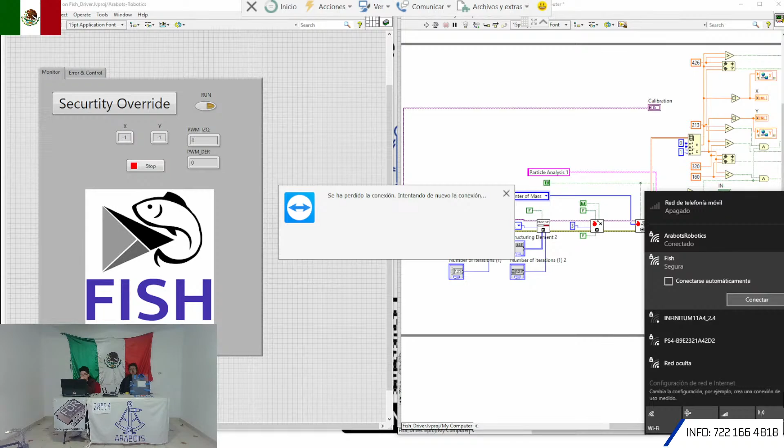Can you see it now? Yeah, so you've got three screens. Are they going to be using a microphone where you are? Let me see if you can hear them. Hello, can you hear me right? Yeah, it's far away, but you just have to make sure you speak loudly.

Okay, there's a slight change in the order. It's okay, you're going first. We're on something else. No, we're fine, don't worry. Thank you very much for that. Okay, Shannon, anything else?

I can't think of anything right now. No, I think you're good. They got control of it, so I think you're good. Okay, so thanks, anything else? I will be doing that, thank you.

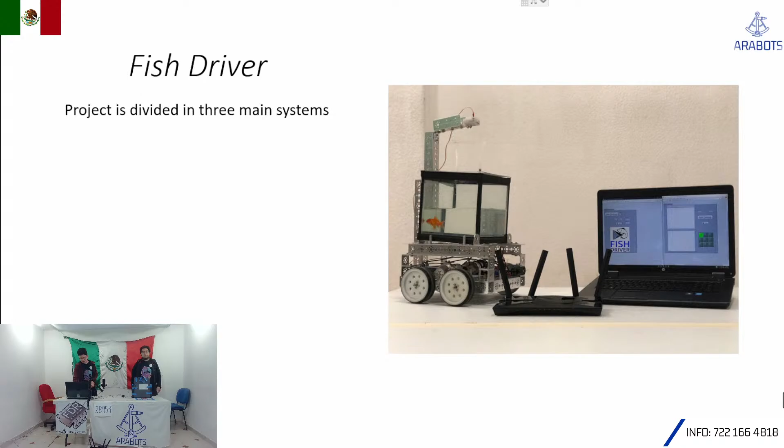This project is divided into 3 main systems: the vision system, the navigation system, and the communication system.

The first module is the vision system. The first step is to acquire an image. Then we apply an RGB model to create a binary image. Then we define our target using different morphology techniques. At the end, we can track our target. The processed image can then be used as an input for the control of the navigation system.

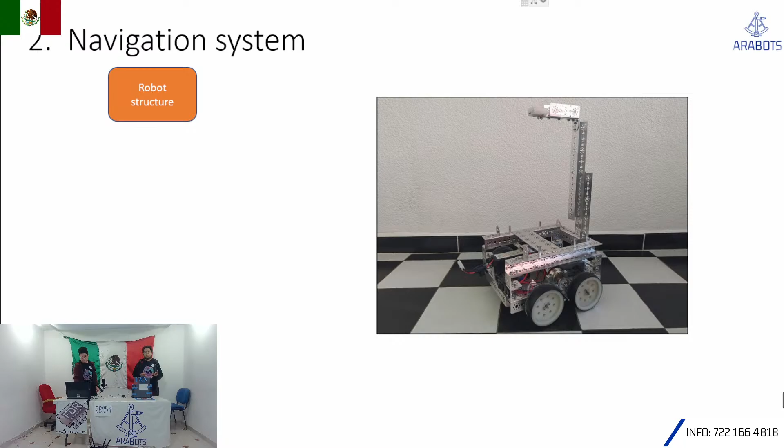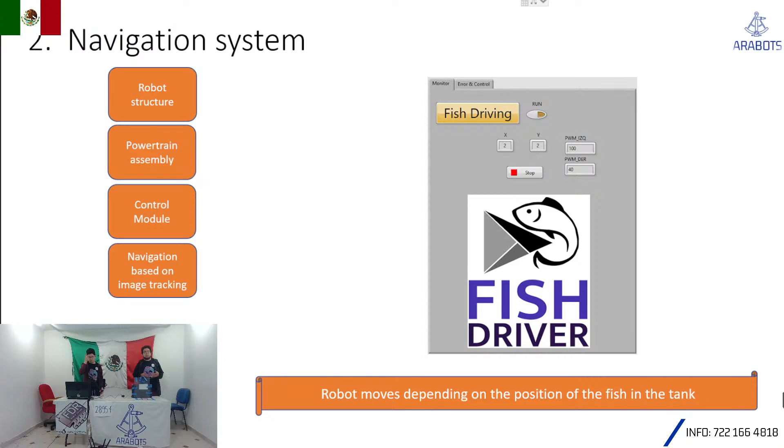The second module is the navigation system. The robot structure is all built of aluminum. The powertrain assembly is the battery and the motors. And the control module is the myRIO. This gives us the navigation based on image tracking. The robot moves depending on the position of the fish in the tank.

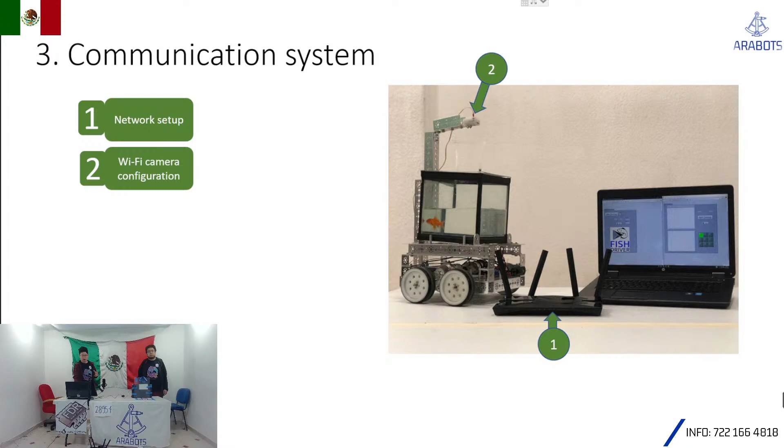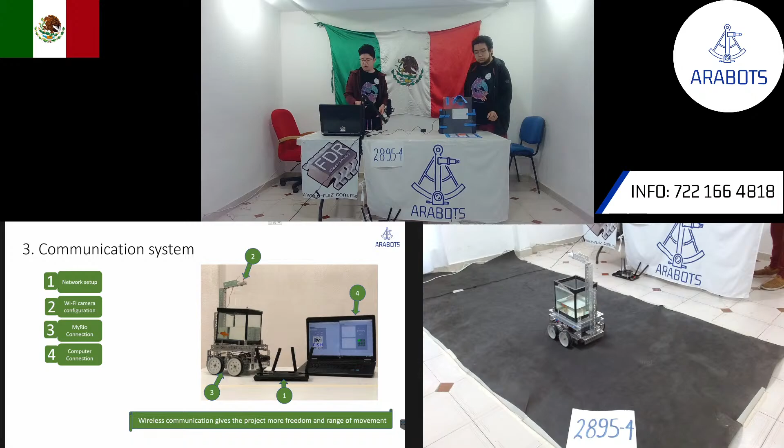Now our last system is the communication system. First we set up a network, then we configure our Wi-Fi camera on top of the robot, then we connect the myRIO to this network, and also connect the computer. This gives us a wireless communication that gives the project more freedom and a greater range of movement.

Now, the product roadmap: we have real-time vision acquisition and image processing, drive control based on vision system outputs, wireless connection setup between systems, and with all of this, we have a full autonomous working system.

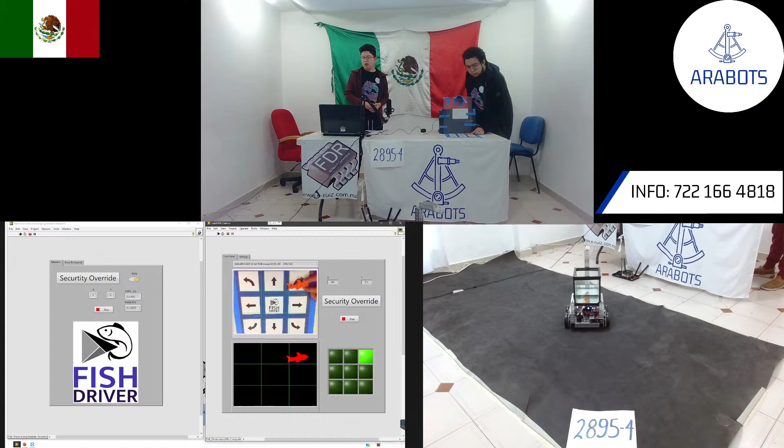Now, while I was explaining that, my friend Daniel was controlling the robot using the security override. This allows us to prevent the fish from going into danger and keeps it safe at all times.

But we can also switch to the camera on top of the robot that is watching the fish. Now the fish is controlling the robot. The robot is moving depending on the position of the fish, as you can see in the bottom left. And now it goes into a danger zone, so we bring it back with the camera.

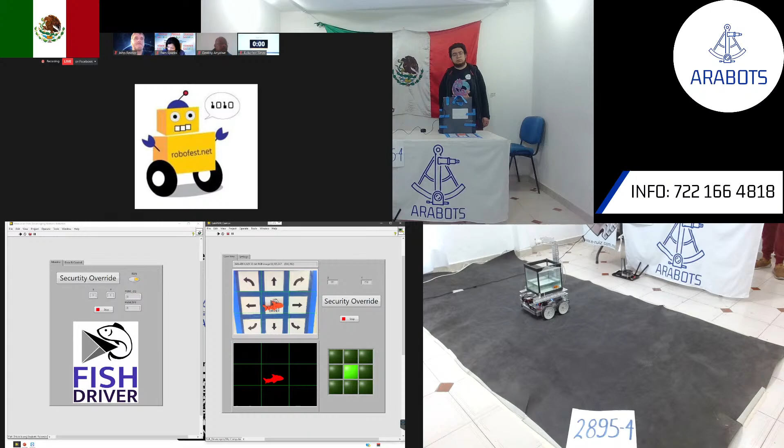Recording in progress. There they are. You have to do our other device. Okay, got it. This is the laptop. Got it.

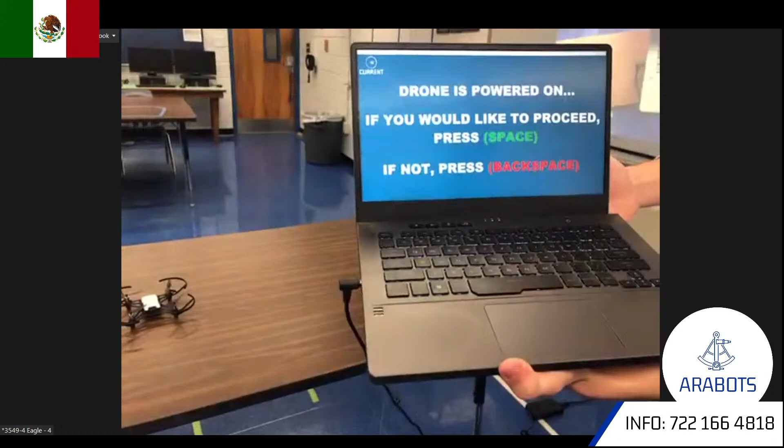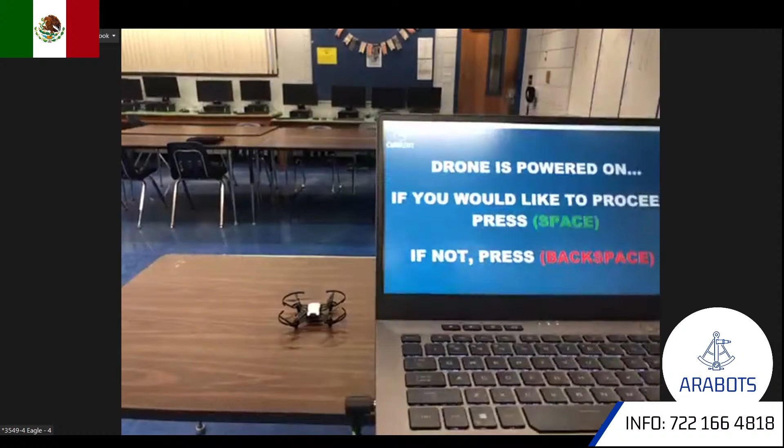Okay, so I first made a prompt because there have been many times while programming this where I accidentally click run, or I accidentally run the wrong program, and the drone just starts flying and mayhem ensues if preparations aren't made. So I created a little prompt: if I press backspace, it closes out of the code and nothing happens, and there's relief that we didn't have a false start. But if I press space, the program will start.

I'm going to start with my closed hand in front, as the instruction manual said. The CV2 window takes about 5 to 10 seconds to load, but now it's loaded. I'm going to open it, and it's going to come a little closer. I'm going to have it do cardinal directions, so it's moving up right now. I'm going to hold it down, and now I'm going to make it travel downward.

I'm not comfortable with this close space, it's too close to me, so I'm going to use force here to make it travel backwards in the Z direction. Then we'll do right, and left. You can also do combinations, because it works as a full velocity vector matrix, so I can make it go diagonal. Let's try bottom, left, and back, and see if it... yep, so it comes down, left, and forward.

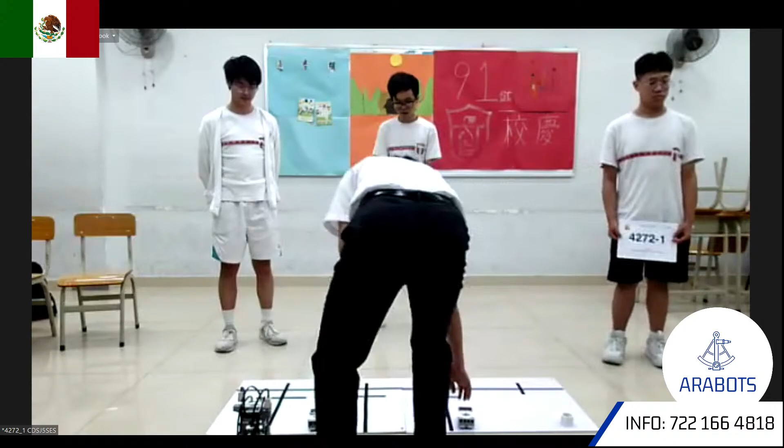So now let's start it over again. So now it's going to room 2, like that.

Okay, so that's all we have for our presentation. Thank you for listening.

Judges, do you have questions? Yes, I do. Guys, thanks for the presentation. What will you say is maybe some kind of training you've gotten, maybe from mathematics, physics, computer science, that you use in this project?

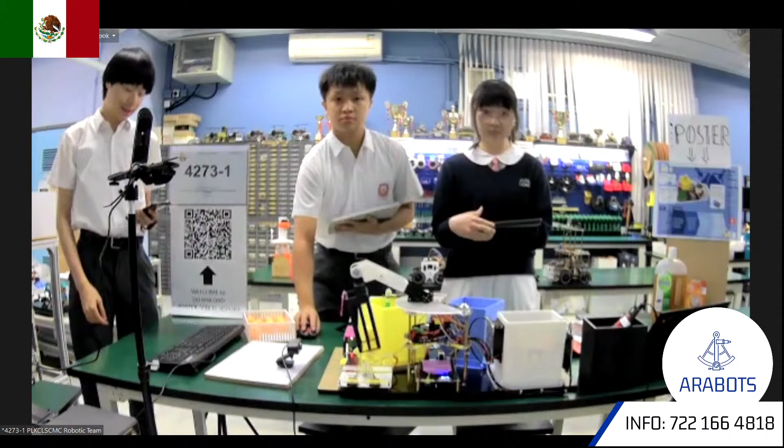Let us demonstrate how our machine operates. When the switch is turned on, two servos will control the arm with a basket containing the table tennis balls to return to its original position. All the data will be reset. The movement of the arm is controlled by the cooperation of two servos: one for horizontal movement and one for vertical movement.

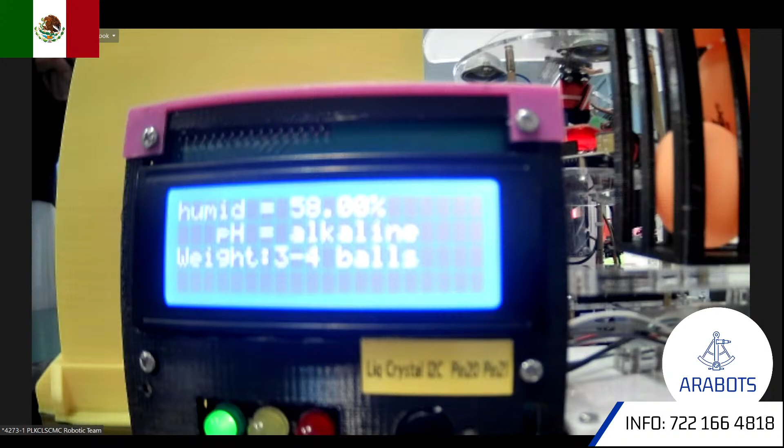The table tennis balls will be soaked into baking soda solution and Dettol respectively. After pressing the start-stop button, the LCD monitor will display all the necessary statistics, including model information, pH status, number of balls added, and humidity of the fan box. The weight sensor is used to measure the number of balls in order to prevent overload or the situation that no ball is put before the soaking procedure starts. The procedure will only start when the weight sensor measures 1 to 6 balls.

The humidity in the fan box is sensed at 58%, and the pH of the baking soda is measured alkaline. The pH meter is installed to monitor the pH value of the baking soda. Baking soda is used for removing grease and dirt, while the table tennis balls are soaked into Dettol for the elimination of virus and bacteria.

The table tennis balls will eventually be carried to the fan box for drying. We have attached heating tubes to the fan so that a more ideal drying temperature can be provided. The drying process will be finished when the humidity has decreased by 5%. After the table tennis balls are dried up, the arm will carry them back to their original position.

For the do-while structure, if the final humidity is lower than the initial one by 5%, the fan and heating tube will stop working and the basket will return to its base. Otherwise, the fan and heating tube will keep working and measuring the humidity every second until the requirements for returning to the base are satisfied.

We have also installed a button. If the measured pH is not alkaline, or if the number of balls added in is null or more than 6, it will not be suitable for the machine to start. It will be displayed on the LCD monitor to remind you to change another tank of solution or check if there is a suitable amount of balls added.

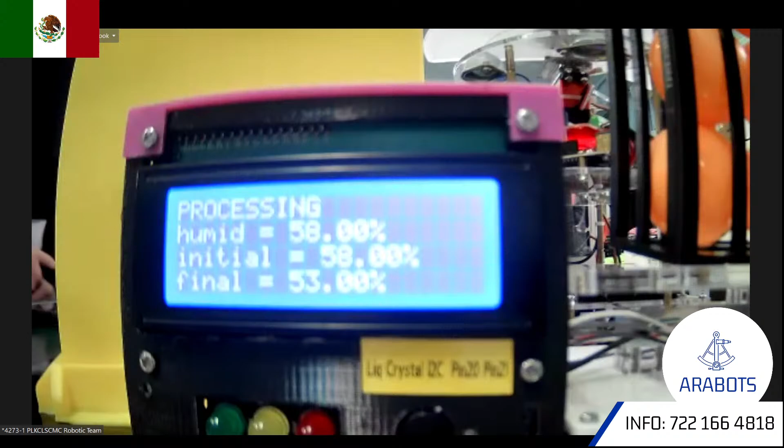For questions and answers? So, yeah. Oh, John, go ahead, please. Go ahead, Destiny. No, go ahead, John. Go ahead. Okay.

How did you come up with 5% humidity being necessary for optimal drying?

Because we have measured it for several times, and after a few experiments, we tried 2%, 3%, and 4%, in similar ranges, and we found out that after the humidity of the sensor in the fan box has decreased by 5%, the table tennis balls are nearly all dried. So we take this value in our program. Thank you for your question. Thank you.

Thanks, John. Thanks, John. Hey, guys, this was a good one. This was good.

So did we see the demonstration of the project apart from the drying? Did you play, or where's the sport activity here? Like, I'm trying to find where the sport stuff comes in.

Mainly we use the table tennis ball as our project's target because it's small enough and easy to do our experiments on. But with further development, many other sports equipment can be used in our program for disinfection, such as tennis balls, golf balls, badminton balls, or even non-sports equipment, such as tablewares in restaurants or pens used in public examination sites can be used as the target of these disinfection machines.

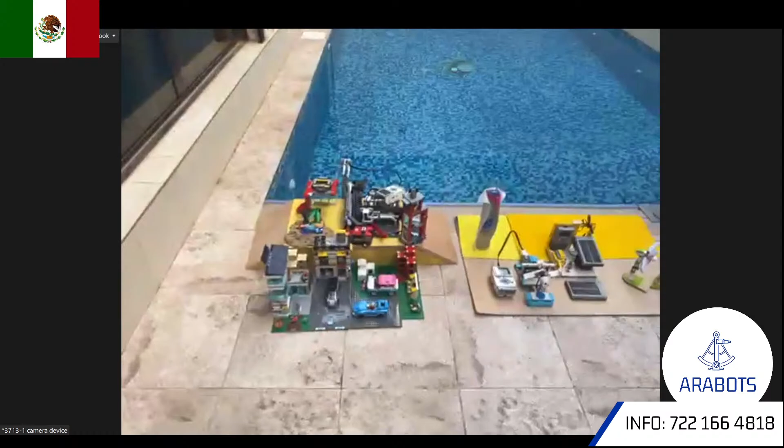As you already know, we had an accident with our project, and this is what we had to do with solving it. First, I'd like to zoom in on our little city right here and talk about our problem. Our problem is the usage of fossil fuels, natural gas, and other non-renewable harmful materials in sea transportation, and how it can badly pollute the sea and make it harder for marine investigations in future scientific research. As well as the long durations it takes cargo and sea transportation, which has led to unnecessary human resource consumption, such as excessive food, excessive oils, and other things we can really cut off on. So what we did to try and solve it is we created a fully automated seaport that uses renewable energy sources, such as the ones displayed right here.

Here we have three types of renewable energy sources. First of all, we have hydroelectric power. Give me a second, I'll talk about the other one while the power is on. We also have solar power and wind energy represented right here.

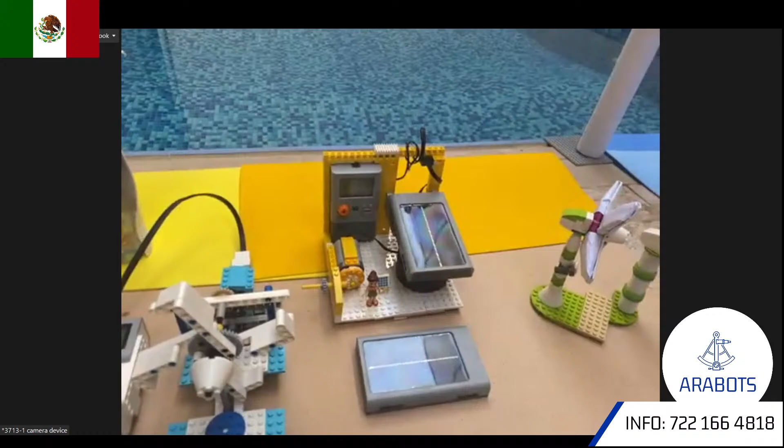Now we will share screen because our sun has set where we are. It hasn't set, but it's not powerful enough for the solar cells. So here, the solar station power uses LEGO renewable energy kit solar cells to power a motor, just to show that it can be used as kinetic energy for future uses. Is the screen share there? One sec. Okay, so this is a representation of its movement in the sun.

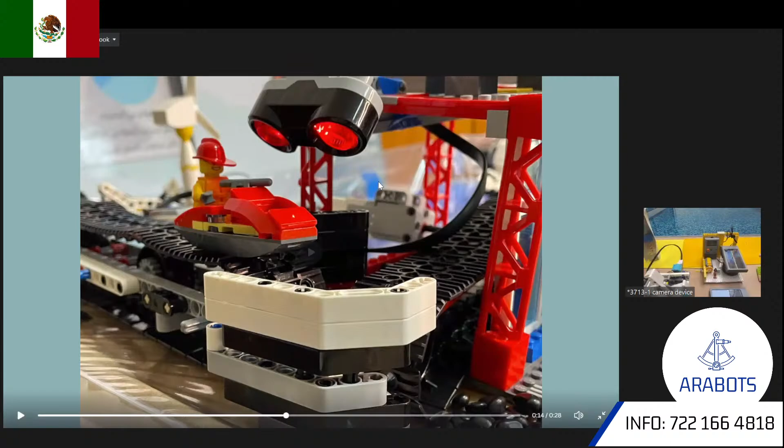Now moving on to the other energy types. We have wind energy using turbines here, and this Heron's fountain using physics mechanisms. This figure has a lab coat and tie right here. This uses conservation and conversion of kinetic energy to potential energy in water systems to be able to produce a fountain to power this lovely device. And this, in turn, shows us how we can use hydroelectric power to move things, such as this hydraulic lift right here for this house.

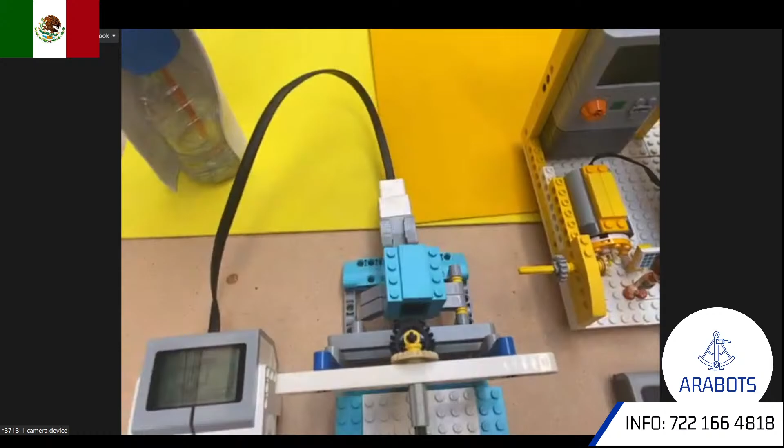And then moving on to talk about our marine system and the transportation vehicle system right here.

The vehicle transportation system starts upon the launch of the artificial intelligence drones that specify the optimal route for the self-driving vehicle to find the perfect destination. After that, it goes with that path to the smart seaports and the designated destination.

When it gets to the smart seaport, which is represented in this model, the vehicle starts here. The sensor detects its presence and moves it into the garage. After that, a collaboration starts between artificial intelligence and the Internet of Things to check the vehicle condition, and then a report is sent to the operation manager.

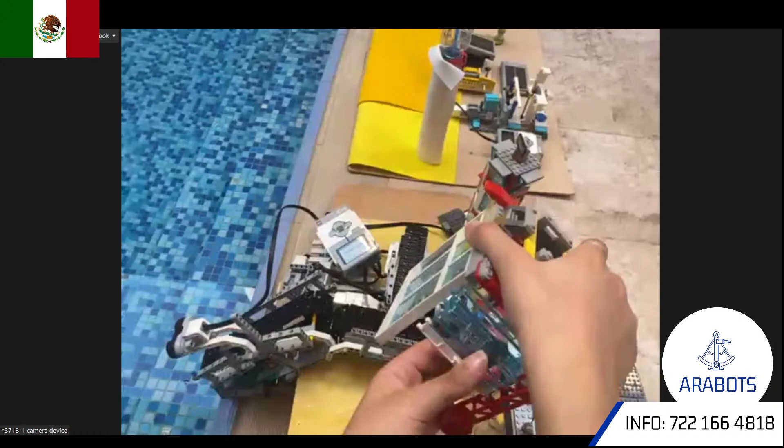As you can see, we had a working prototype before, but after the water incident, the sensors are no longer working, so this won't be powering today. This is the garage, by the way. It used to move, opening and closing like this.

What we'll be moving today is our prototype. And since our little pool wasn't working before, we're going to use the house's entire pool, so hopefully that's better.

Now I'm going to talk about the vehicle. The real vehicle can be used in more than one field: travel and transport, entertainment and tourism, marine rescue, and search and exploration.

It has 2 powerful, compact, high-speed electric motors and can go up to 2,000 horsepower. The battery has a capacity of 4,000 kilowatts, non-static battery.

Now we're going to show you the prototype. The vehicle's design is streamlined and resists fluid movement for optimal speed.

Can you tell us a little bit about its motors and how it works? Okay, it has a motor and a servo. It has a 7-volt battery, and the servo can control 3 channels and control all the things inside.